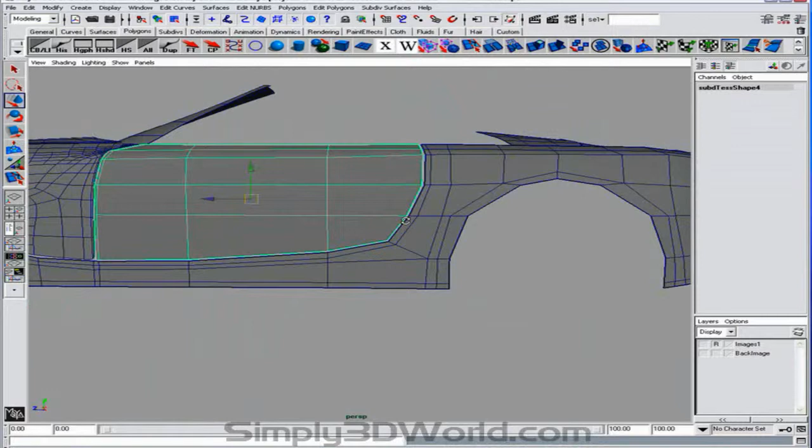Some extra little faces there that were causing some trouble. And we'll see what we can fix up in here. Can probably get away with merging these guys.

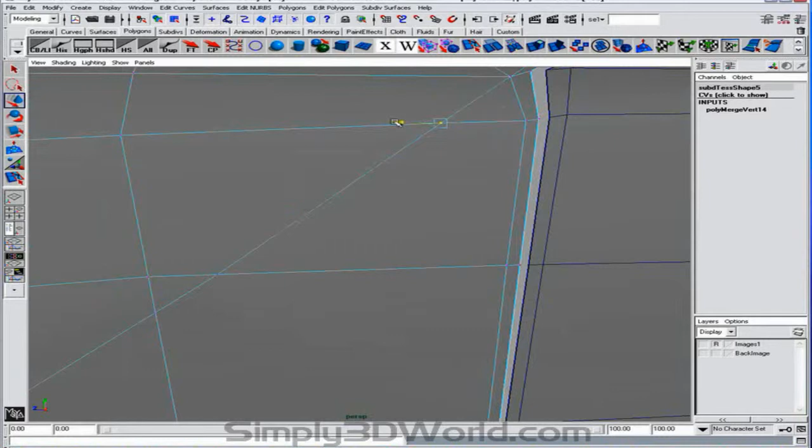And just straighten that out. Alright. So these guys can probably get merged up as well.

Now for this bottom part, what I want to do is put a nice edge, kind of like the one just below it. And that'll serve two purposes: one, keeping that edge really nice and crisp, and also keeping the shape of our wheel well.

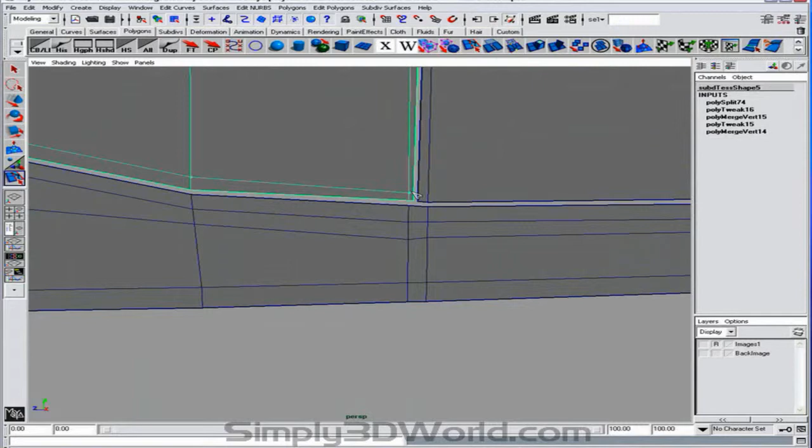And these should be able to get merged up for now. Bring back our image plane, and just want to make sure that that line is nice and straight. And we can probably straighten up this whole little section for now.

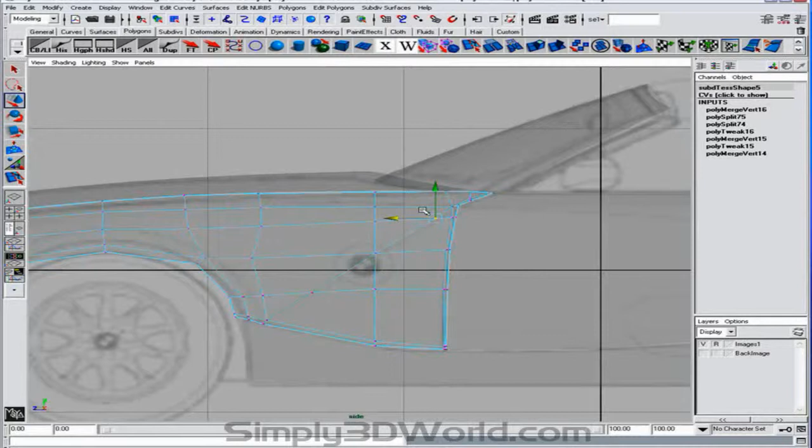Okay, so now we have our door cut out and our one fender. If you look on the side here, we have a cut that happens right in this section here.

So what I'm going to do is select the vertices of these two sections, and pull them up at the same time. So I'm going to shift select all of these vertices, and kind of push that up into the correct area.

Now this might throw off our wheel well a little bit, but all we need to do is go in there and add an extra line back in here. That way we can push this out a little and still keep the line.

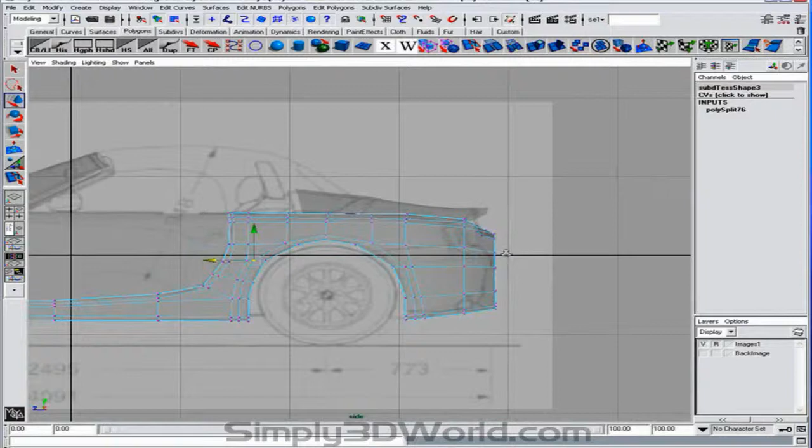Same with up here, there's another line that gets cut right apart on our model. So we're going to add that right now while we're on our side view. And just go back into perspective so you can loop around, and we'll just clean up the geometry a little.

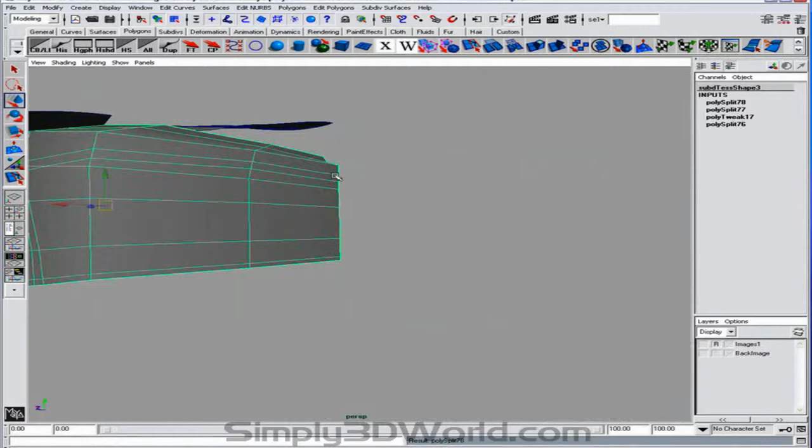And we'll just move this back. And again, you want to follow that line as closely as you can because it's going to get cut out later on.

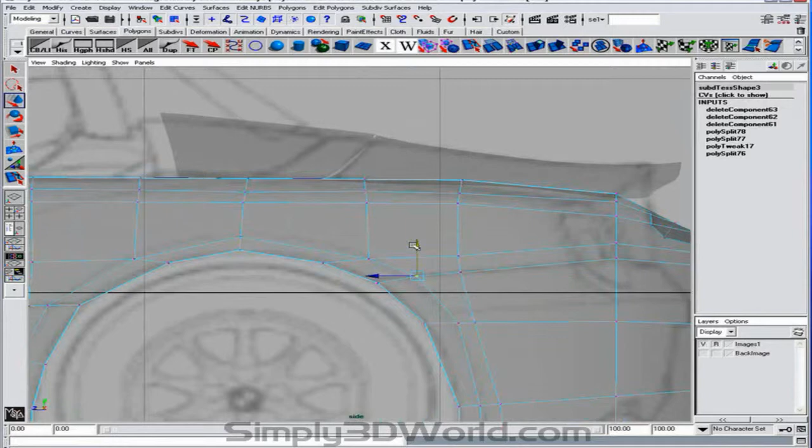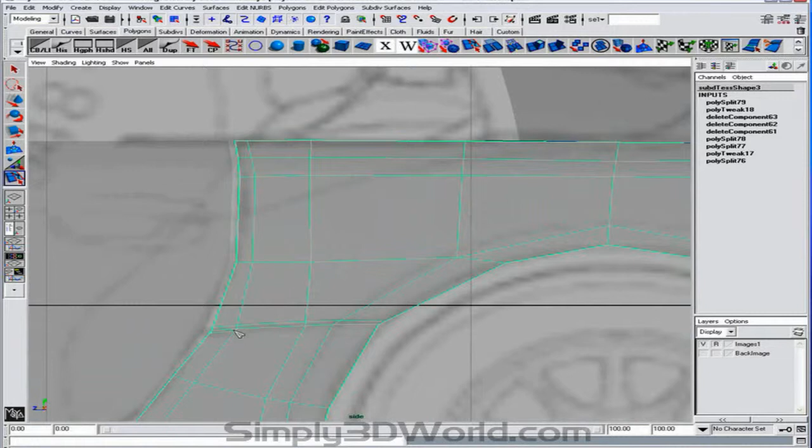We can actually cut this one out right now. And we'll just grab our split polygon tool. Split polygon tool is probably one of your best friends when it comes to modeling. Just put another line down here.

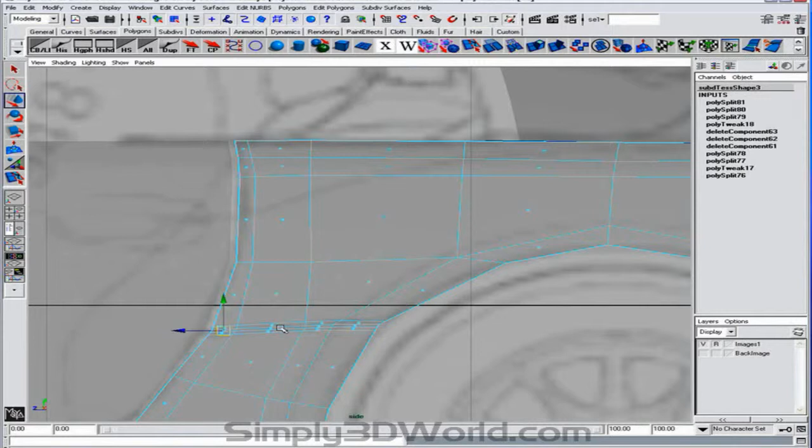And we'll just select the inside faces. Now the reason why I'm not cutting out the back part here right now is because we're going to have to shape the back a little bit more before we get to that point.

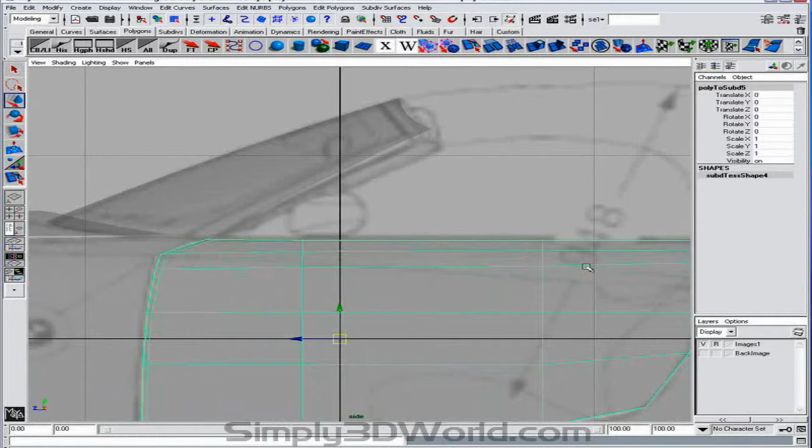And what we can do now is we can actually manipulate the side a little bit and follow some of the contours that you see here. See how this kind of comes up and down on the side part of the door, and it kind of comes onto the back side a little bit there.

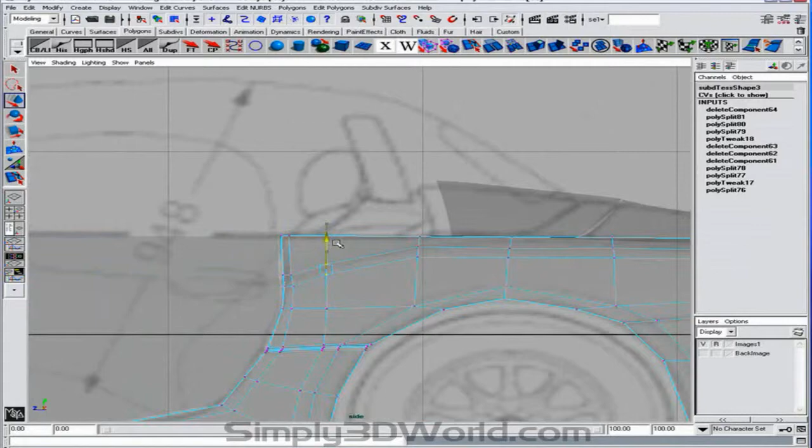Looks something like that. Now what we're going to do is just test it out real quick, see how it looks with a nice smooth on it. So we're just going to change the subdivisions. The fastest way to check out your work and see how it's starting to come along.

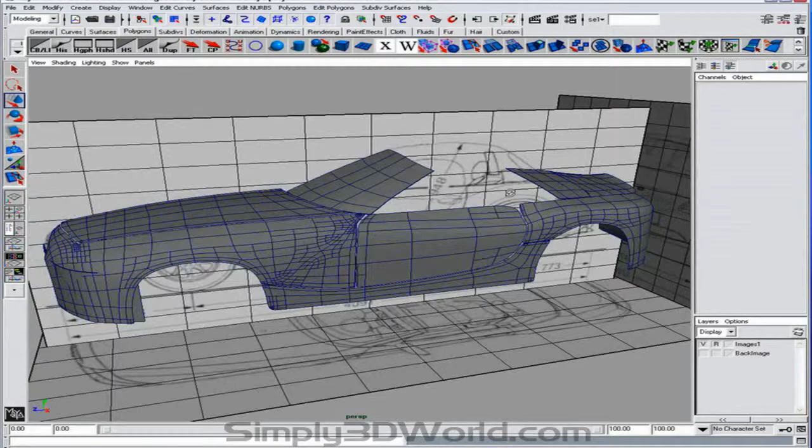And you can see slowly but surely we're starting to build up detail. Now our door's a little rounded up here, so what we're going to do is change back into a regular polygon. And just like before, you need to add an extra line just to help straighten that up, keep it nice and crisp down in this area and along the outer rim.

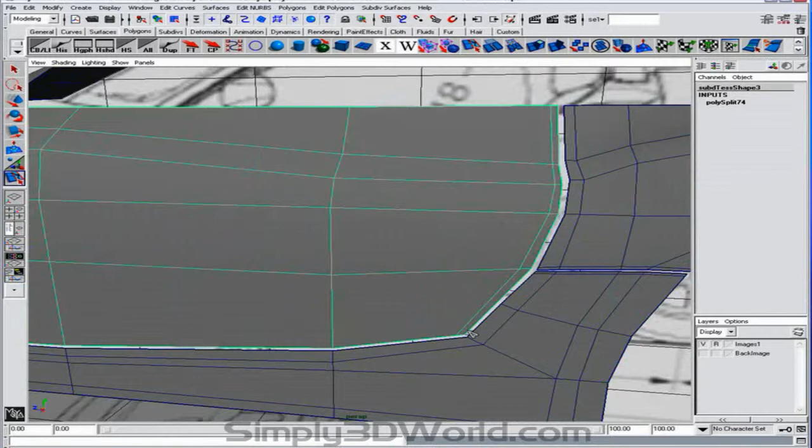We have one on the front part of the door, but we don't have it on the outside. So now when we smooth, you see how it keeps that door nice and crisp up there?

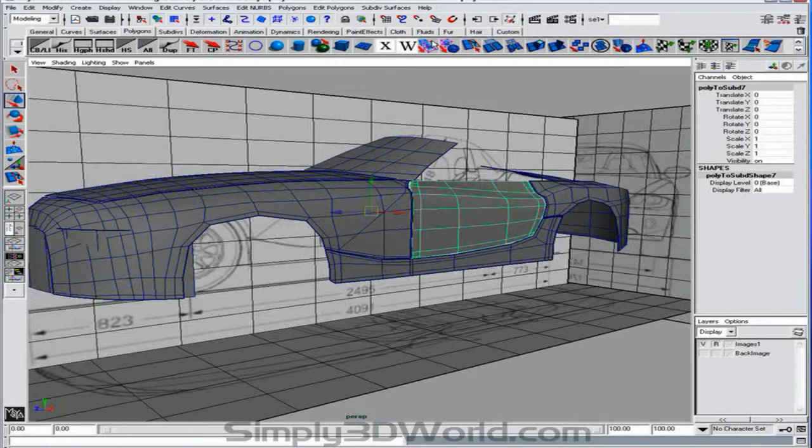Alright, so we're moving along really good for just doing tutorial sections. So what we can get into now is we're going to knock out the rough shape of the light. That way that'll help determine what we need to do at the front here.

So we're going to go to our top view and mark out where the light needs to be. So we're going to grab our split polygon tool, and again we're just going to start making our mesh look really messy at first. But again, this is all just to get everybody in the right position.

And I'm going to draw another line down here. Oops, one too many Z's. There we go. So that's going to be the cutout part of our light there.

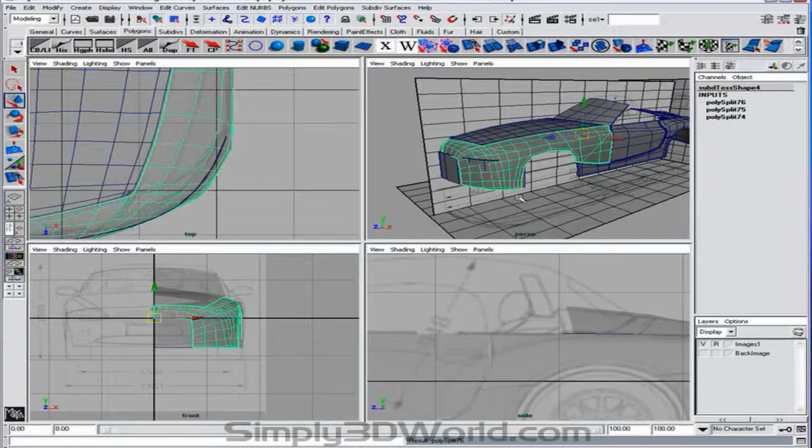And we're going to go to our side view so we can see how far down it comes. Actually, side view is probably better to use than the top view. So I'm just going to redo some of the little areas that we just did, just because you can see it a little bit better in the side view. See how it kind of comes down a little bit?

These little guys are going to merge right together right off the bat. And again, grab split polygon tool and just start following as closely as you can the contours of your light. Like I say, the mesh gets messy, don't panic, because it all gets cleaned up anyway. And now he's going to come down this way.

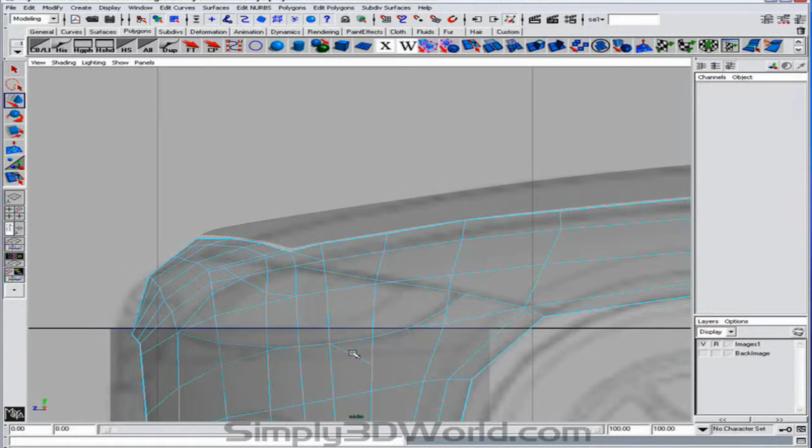And I'm just going to delete all the edges on the inside there that we don't need. And you see, just by cleaning it up, you're getting a good idea on how things are going to look in a minute. This guy can kind of come push right into there. These guys can go.